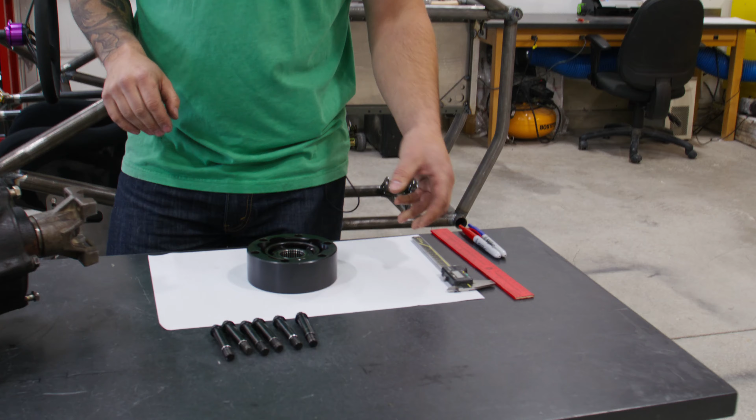So a quick and easy way to do this is to put our parts right onto the piece of paper. We're going to be looking at doing something like this. We don't necessarily need to worry about our pattern yet, but I think we're going to end up doing a pattern that looks like this. We're going to do all of our CV measurements in red. Let me go ahead and trace this out. I like to just use the parts to give me the layout so we don't have to worry about it.

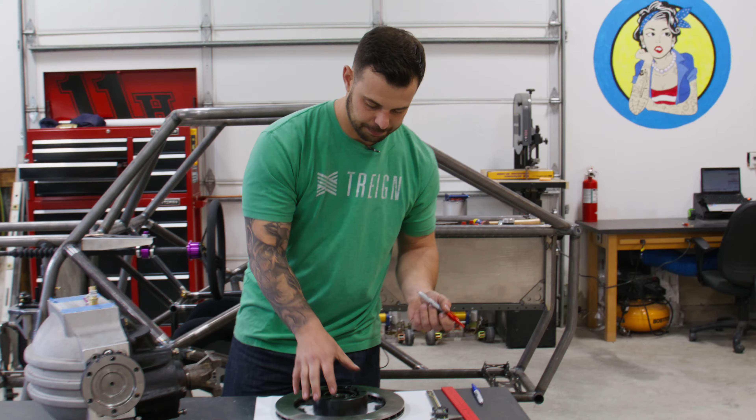As we do that, we can also come back in here and trace out our brake rotor on this. We're just gonna roughly trace out our brake rotor. What this is doing is telling me how many holes I need to put in this template. And then we're gonna take our calipers and create some measurements as we do this.

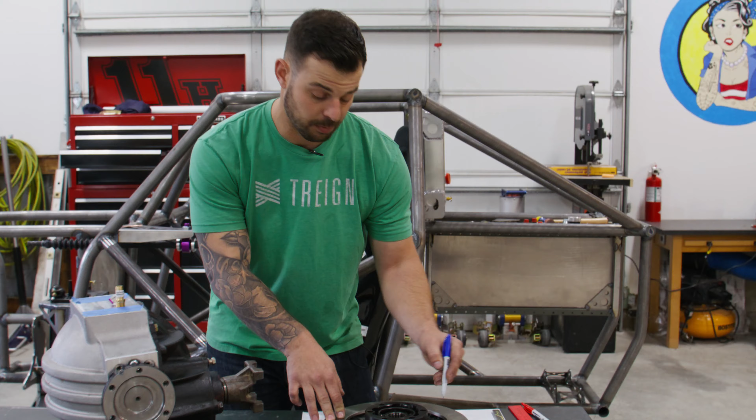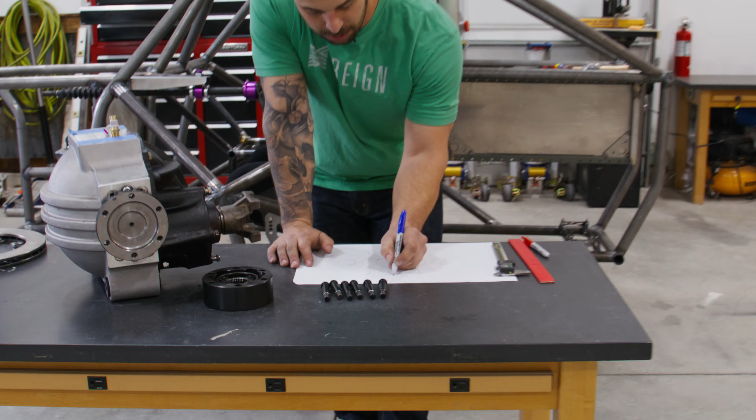Okay, so now we can go ahead and pull this off. We can also pull our CV out of the way. We gotta be careful because this can all fall apart, so we wanna kind of pinch that. Now that we have a general layout here, we're gonna draw in our circles. So this would be one bolt hole, second bolt hole on our rotor, and then we can do the same thing, hole and hole on our CV.

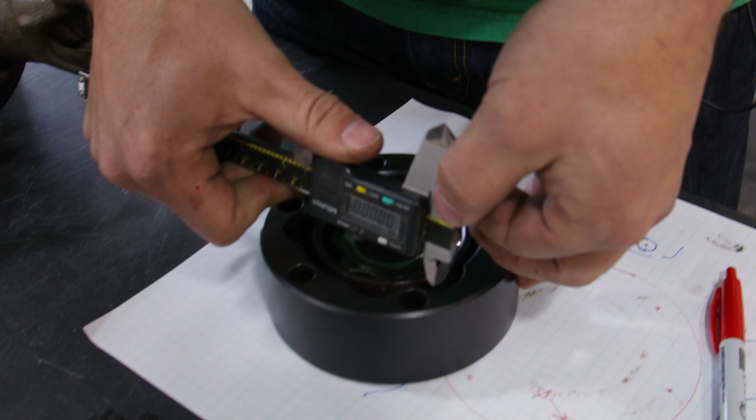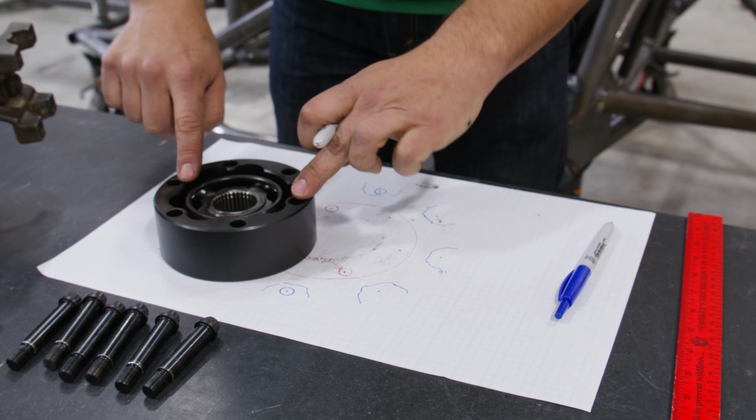The first measurement we want to take is the actual hole diameter. So let's take our calipers. These are cleanly a 1/2-inch hole. That looks great, that's easy math for us. The next measurement we want is the actual hole spacing. We're going to have 1, 2, 3, 4, 5, 6 holes, and we're going to measure center to center on that cross right here.

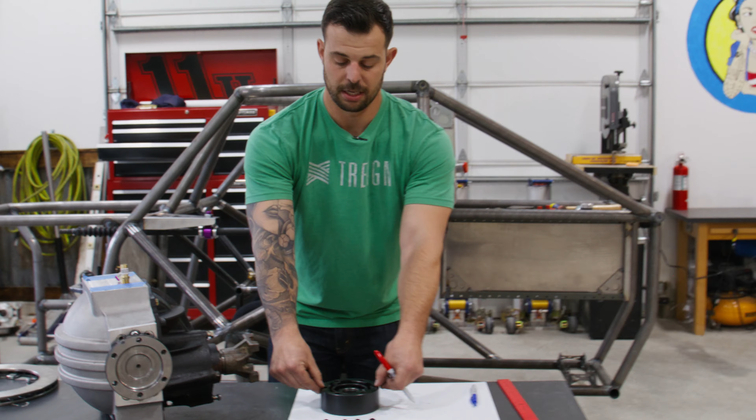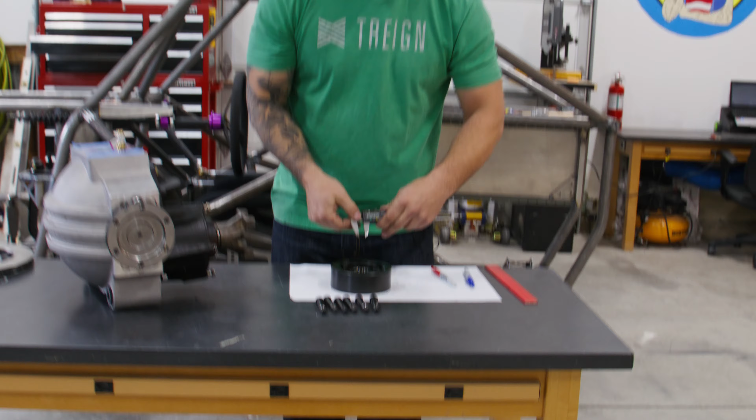A quick way to do this is you can measure the ID to ID on the 2 holes. We can measure from here to here, or from here to here. It doesn't really matter which way you do it. If you measure on the inside of the 2, you're going to end up adding the diameter, right? That gets us back to the center of those holes. So let's do it as an example here.

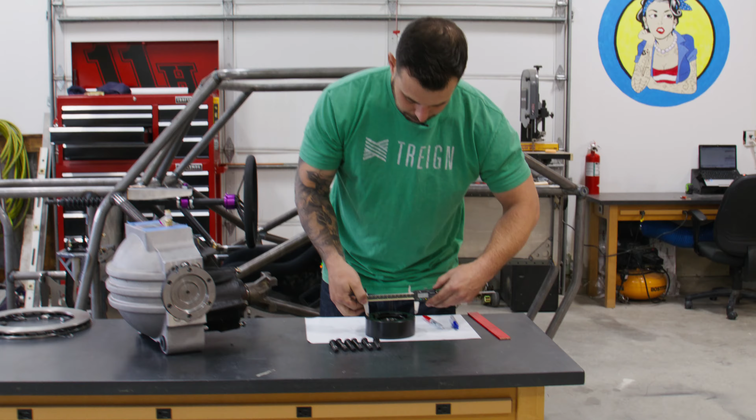So if we get this measurement of 3.7, we're going to call it, probably 3.745. That's it. Reading them upside down. Yeah, we're gonna say 3.745. We can draw a line in here. So we're measuring from inside to inside right here.

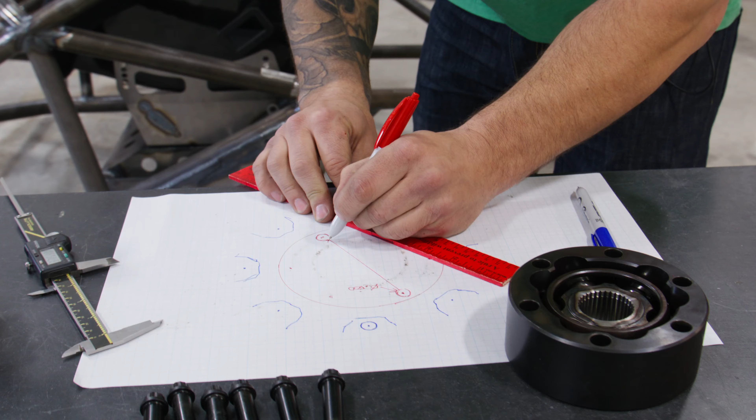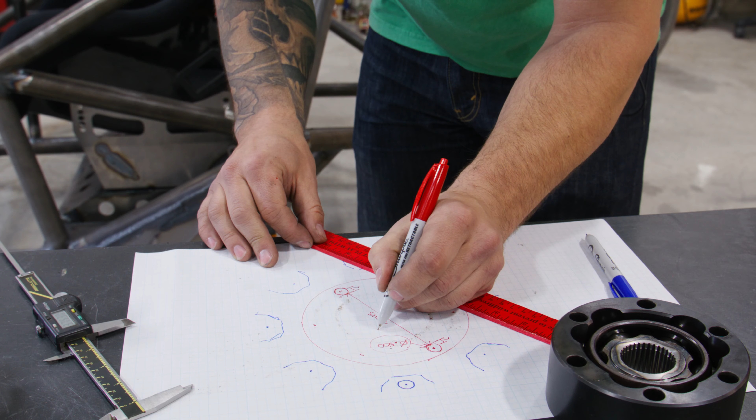This is 3.745. So we need to add the radius here and the radius here, which happens to be this diameter. If we add that diameter, we get 4.245. So this is most likely a 4 and a quarter split. That's probably what we're gonna design it for.

The next thing we're gonna do is rinse and repeat on the rotor, the same exact process, creating that hole pattern here. We also gotta remember that we want it to locate onto this stub axle. I want it to sit onto this shelf right here and locate so we're not wishy-washy out on the outside. And we also need this small bore put into the center of this part, so that the center of our CV and the axle can twist and locate into those.

Since we have a little bit of movement here, we have to have some clearance built into that. So I'm gonna arbitrarily draw a little half circle in here, and then I'm gonna call out the diameter. We're gonna take a quick measurement over here.

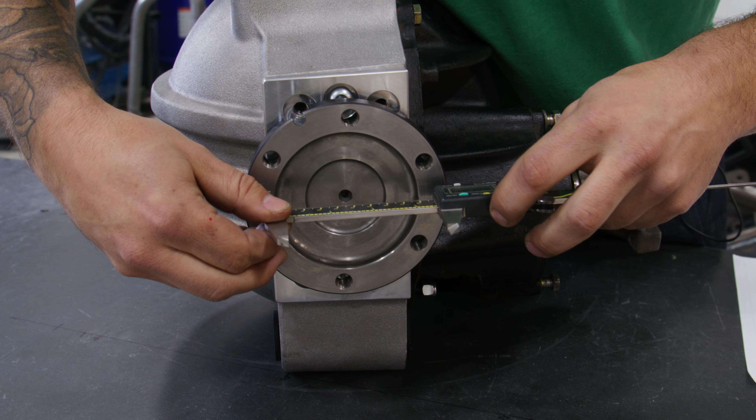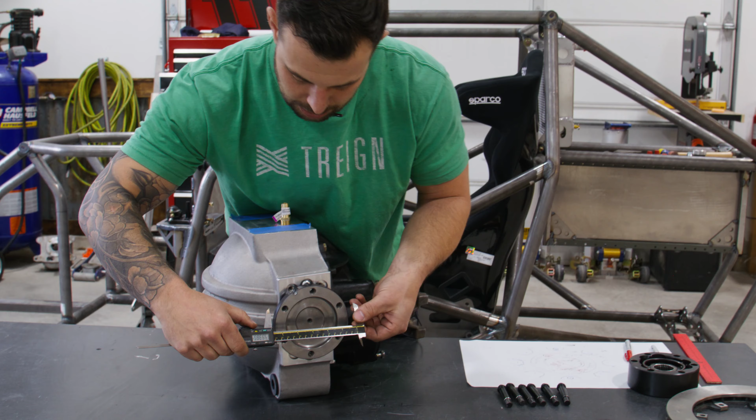So this is looking like 3.5. So we're gonna take that 3.5 in. And yeah, okay. And then one last measurement, we're gonna go ahead and measure this nice and accurately. If we wanted to get a press fit or something, we'd be using micrometers, but we're gonna end up oversizing this just slightly enough to have a nice slip fit.

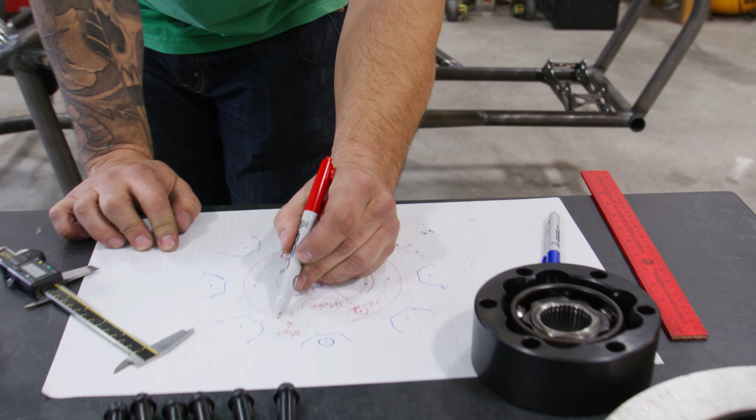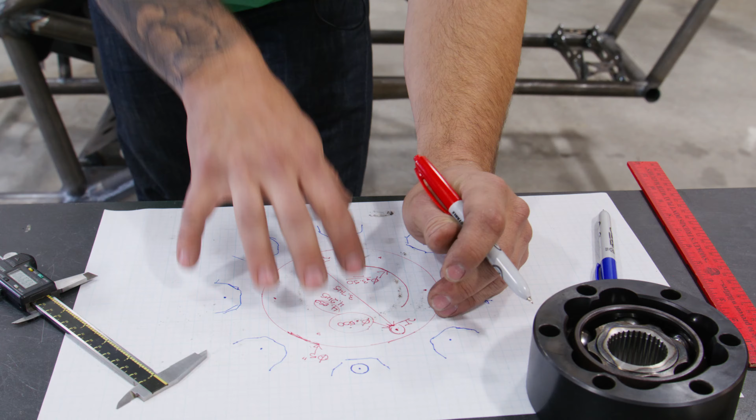So we're gonna go ahead and just make this diameter 5 inches. So that's the outside diameter of our CV. So we have all the dimensions we have of the CV now. So we have a 5-inch outside diameter. We have a hole center to center. So our center to center is gonna be 4.25. We have that inside little pocket that we're gonna end up making go all the way through. That's gonna be 3.5 inches. We're gonna go ahead and do the same thing, and then we're gonna head over to the office, draw this up in CAD next, and start making our templates.

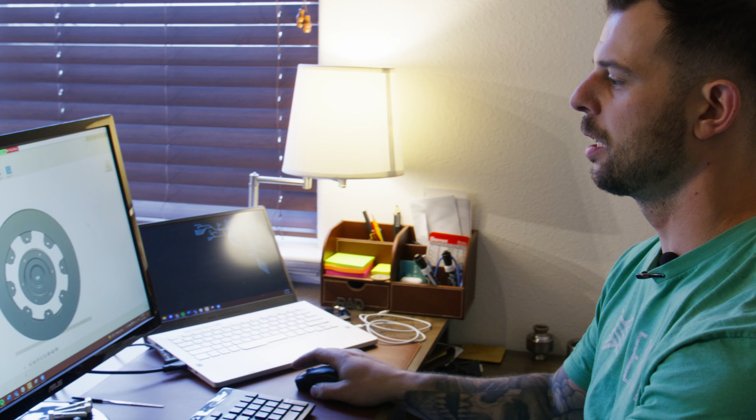All right, so I went ahead and took those measurements and we put them into CAD here. I actually ended up reversing the entire rotor and CV. This is gonna give me a little bit better of a depth perspective when I'm actually gonna be making these parts. The big thing that I wanna kind of show is that we can take and use SendCutSend to create a blank for us to CNC machine. So instead of starting off with a big flat piece of material in which we have to do all the features and cut the part out, they can actually cut the part out for us, have most of the features put into it, and then we just do a little bit of finishing work.

One, it simplifies all of the efforts that you have to put into it, like holding it down or tabbing it and having to cut the tabs off later. But it also allows us to not have all these random scrap pieces of material and oversized pieces of material that we have to find and source. We just kind of get the part that we need.

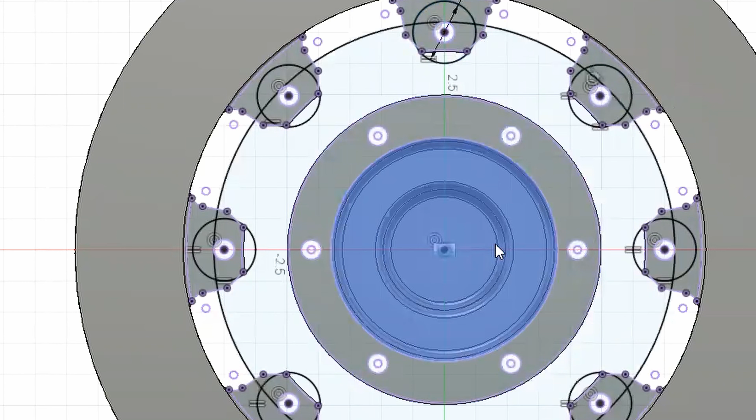So let's go ahead and look at this. I ended up creating a little pattern here, similar to what we did just in the shop a second ago. And we created a sketch. Using the holes, I ended up just projecting all of those features onto a nice flat surface. And then we can go ahead and extrude those, and we end up getting that mounting bracket that we're looking for. Now this current mounting bracket, we're gonna take this DXF to the shop. I'm gonna cut that out in that CO2 laser, just to double check hole placement, double check the orientations, that we don't have any weird things that are outside of our current views.

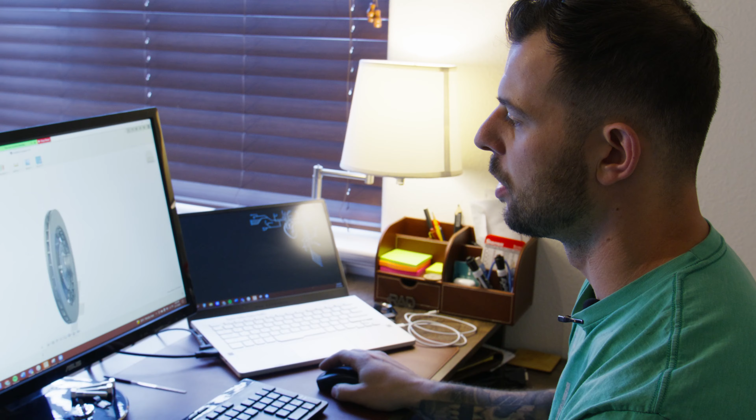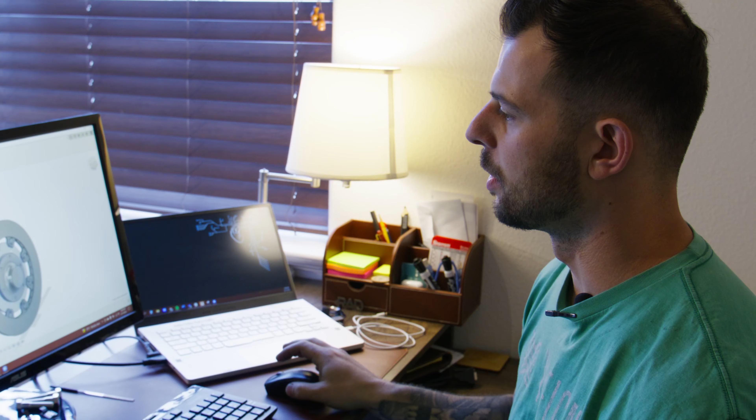I wanna check that that internal diameter here allows that CV to articulate the way it is intended to in the end. And then once we double check that, we're gonna go ahead and extrude that and create these little shelves for it to sit on and auto-locate onto the CV and the rotor, so that we're not having to line the holes up on a flat surface. It locates onto a little shoulder, and then we can put the bolts in. So let's go ahead, save that DXF now. I'll go double check it, and we'll move forward from there.

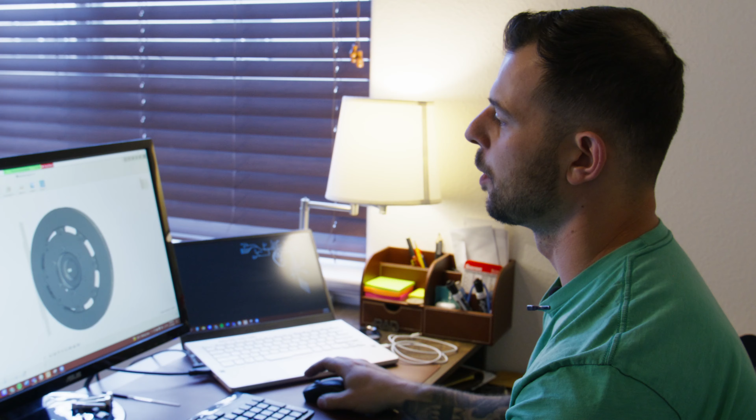So off camera really quick, I went out there and double checked it. There were a couple things that I had to fix. First thing is that the holes on the CV were too small. We have the shoulder bolts that are gonna end up going into those. I forgot to make them the same size as the shoulder. So we went ahead and fixed that, and I made them slightly larger to fit that shoulder. The inside diameter was great for the CV axle. It allowed it to articulate like we wanted it to, as well as the patterns all matched up. So I went ahead and did that.

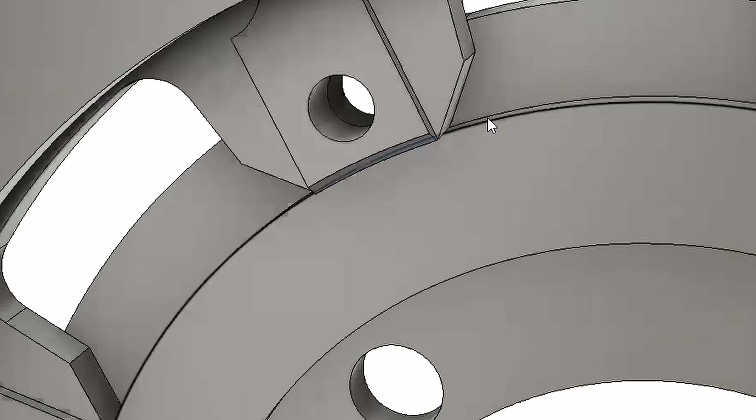The next thing I did is I created that little shelf for our CV and our rotor to sit on. So if we bring in our rotor here, we can see that our rotor will end up locating onto this little shoulder right here. And our CV will do the same. So we can kind of see in here in that little blue line where our CV is going to be located. One other way we can look at this is we can come in here and we can do a section analysis.

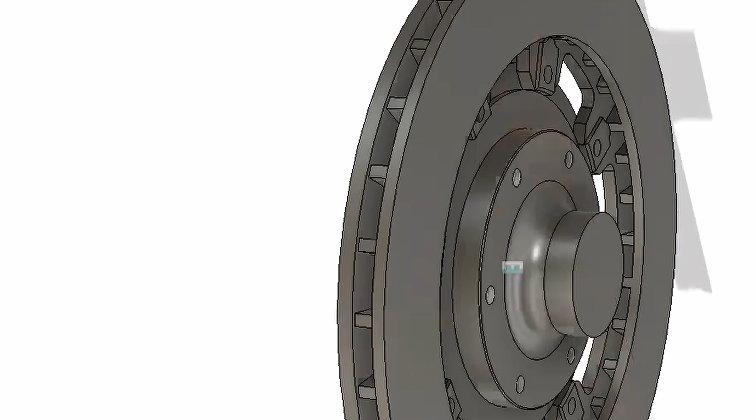And when we look at it from that side view, turn off analysis, we can see here that we're going to locate right here on that corner, and we're also locating in on this corner, as well as our holes are all nice and lined up.

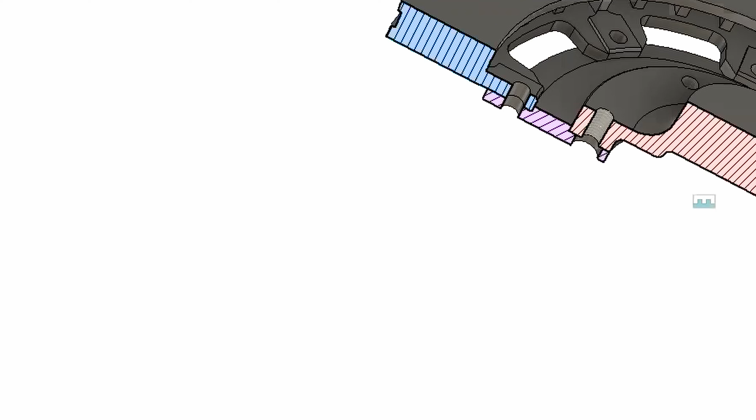So the next thing is now that we kind of have all the design done, we're going to go ahead and switch over to the CAM side of things. So in this one, I'm using Fusion 360 for my personal stuff. This one has a really cool built-in CAM feature, so I can go straight from that modeled part and go to the CAM. So let's go ahead and do that now. We're going to turn off analysis, turn off those other parts, and we're going to switch over to manufacturing.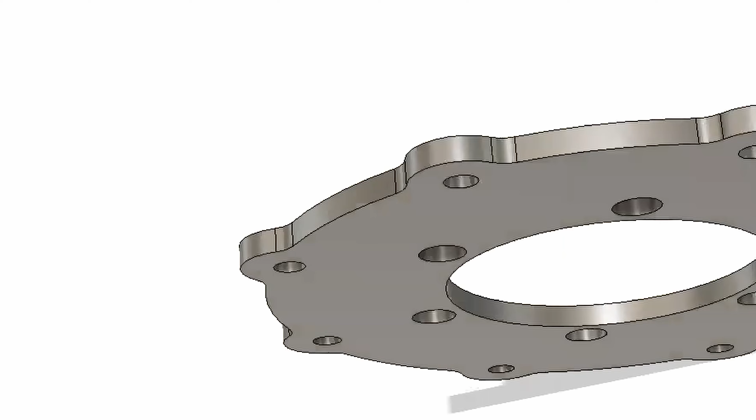So the big thing on this is that we can look at the thickness of our material. So on this one right here, I went to SendCutSend's website and I chose a 375 thousandths thick aluminum. That's the thickest aluminum that they have. It's in the 6061 series. We're gonna go ahead and use that. We're gonna maximize the thickness that I think I can get away with here.

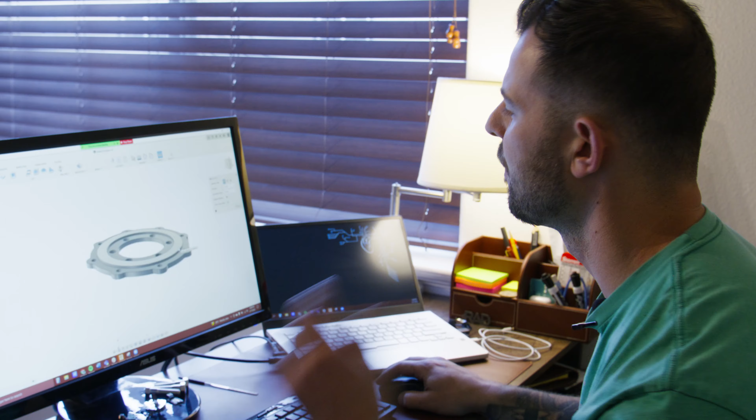So we have a 1/4 inch thick flange, and we're gonna end up having that 135 or 125 thousandths shelf there, right? To make up that 3/8 thick piece of material. So like I said earlier, the cool thing about SendCutSend is that we can essentially get this blank cut out that we don't have to cut out of a plate.

So another way that I would end up designing this would be having a plate, and then I'd have to contour my end mill all the way around this thing. That's a super great way to do it. There's nothing wrong with that. But if you say didn't have access to a CNC machine, you could just cut this out of 1/4 inch material and you'd be done, right? You'd have that mounting flange.

Or you can cut it out of this 3/8 material, and then we can groove in these little lips and stuff and make this part a little bit more versatile, a little bit easier to locate when we're putting it together. They aren't necessarily needed features, but maybe it makes it a little bit fancier. And we don't have to do as much machining on the back end.

So what I ended up doing is you can go ahead and undersize your holes. So I'm gonna go ahead and actually interpolate and re-pocket all of the holes that SendCutSend is gonna be doing. So all of my holes are gonna be 10 thousandths of an inch undersized. That's gonna be just enough that I can come in on a full depth and just do one single cleanup pass on every single hole, as well as use those holes as a locating fixture in the machine.

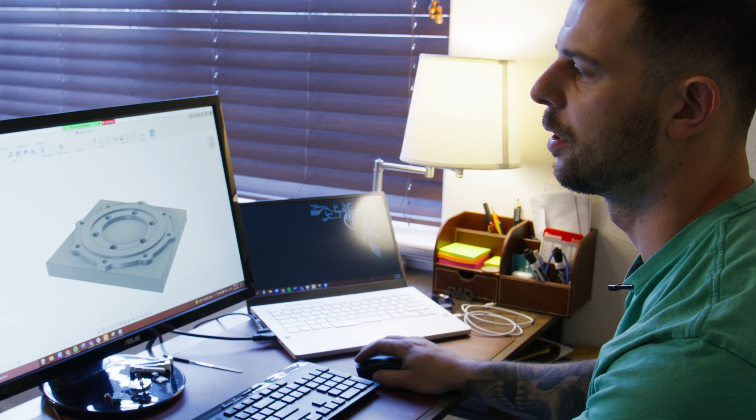So let me show you kind of how I did that. I went ahead and created a plate on the bottom. So we always have kind of random scrap pieces of material laying around, and in that material, I'm going to drill and tap these 1/4-20 holes in that plate. These are going to be used to mount the part down to it.

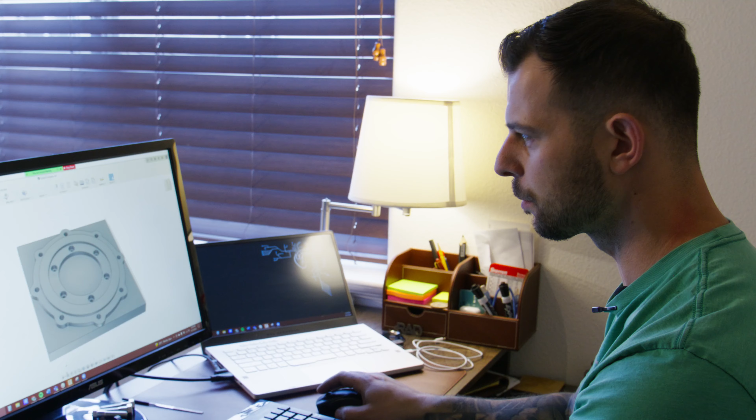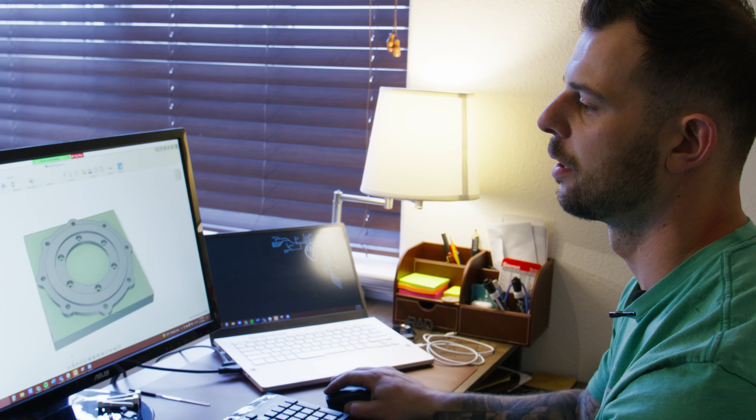I typically have a plate in the shop that I just do this kind of stuff to. I just turn it into Swiss cheese as I make different parts on it. So I'm gonna go ahead and use that plate. We're gonna mount this down, and then we can create all of our different fixturing on it. So we're gonna do this in 2 different operations. We're gonna first mount through our inner holes and then do all of our outside holes. And then we're gonna switch our bolts to our outside holes and do all of our internal holes.

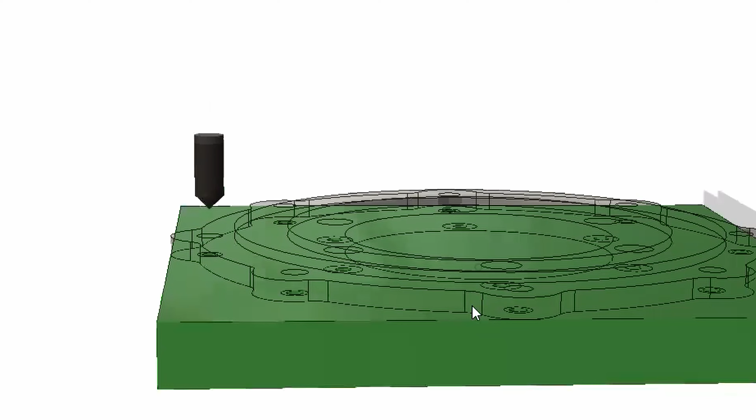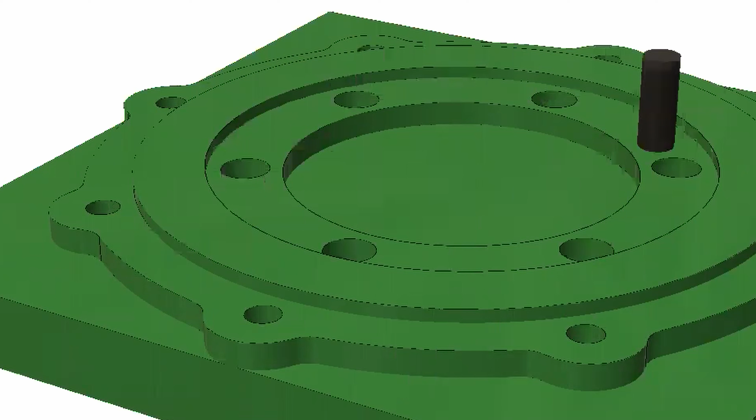And then we can go ahead and actually look at that final simulation and see that we have a plate in here. We can see how that's just gonna actually end up contouring and removing this material out of here and ending up with the final part that we actually want. So we're not gonna actually see any material being removed here necessarily because we don't have any material to be removed other than that little 5 thousandths variance here.

So now that we kind of have that settled out, we're gonna go ahead and take this to the CNC once we get these parts. So I'm gonna go ahead and order these parts from SendCutSend and get these parts back. We're gonna go straight to the CNC and machine these parts, and then we'll go to the shop, check it out. Like we talked about in the office, we got all the CAM stuff taken care of in the background while we got ready for this part to come back to us. We got the part to us now.

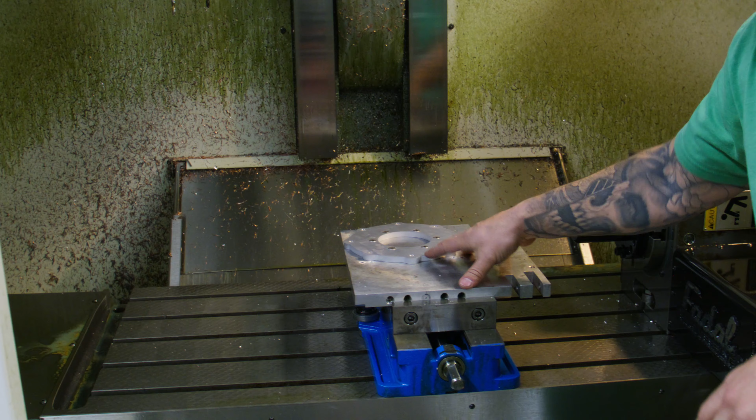I've gone ahead and made that fixture by putting all those tapped holes in that we talked about earlier. So let's go ahead and look at what I got here. We have tapped holes. I just have a random plate here that already had a bunch of holes in it that was scrapped in the shop. There's tapped holes, 1/4-20, in all of these holes also. So I went ahead and put all of the bolts in, tightened them all down so everything's all nice and centered.

We're gonna go ahead and run the first operation of this program, which is gonna thin out this outside, turn this contour on the outside, and then true up these holes to the actual size that we want. We'll go ahead and switch to the second operation by moving these screws out to the outside. We'll turn down this inside area and clean up those holes, as well as this inside contour here to match that CV. So let's get into it.

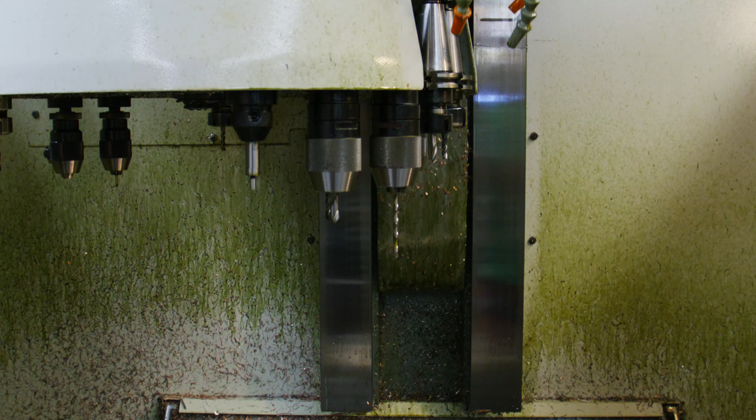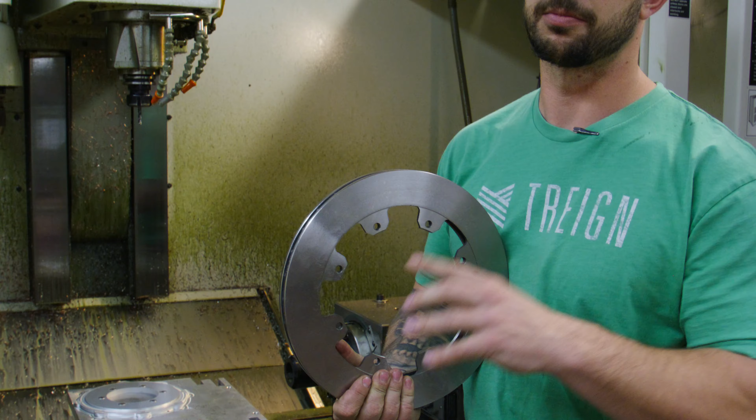All right, so the first operation's done. We turned down that outside. We have a little recess. What I want to do really quick before we switch over to the second operation is check the fit, that locating fit that's on the outside of this, on the rotor. So as we kind of come down, we have this beautiful fit. Look at that. And the holes all line up. So we're good to go.

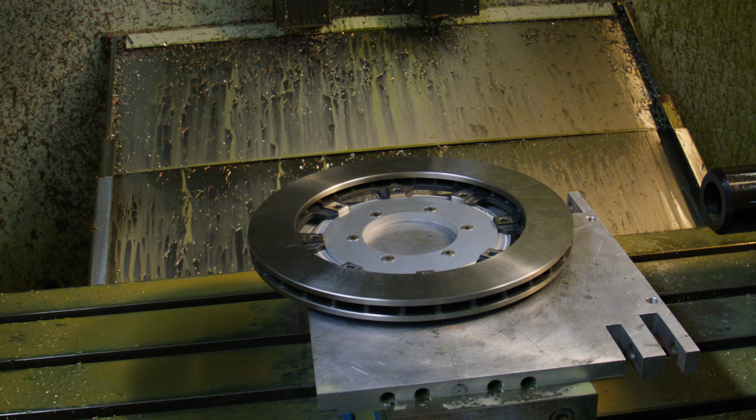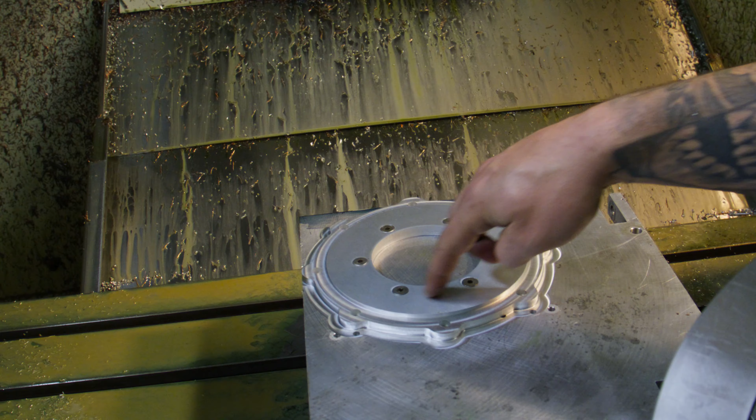This is actually gonna be flipped over this way, but since I can't check it, we're just gonna flip it this way. So when we actually mount it on the car, it's gonna be the other way. So we have a nice flat surface that these are now mounting to. We're gonna go ahead and swap out these screws. We're gonna move them to these outside locations here so that we can turn down this inside ring and true up those holes also. So let's get after that.

All right, second op is done. Everything looks really good. We're gonna go ahead and take this off, go over to the car, put it on there, get everything bolted up, and check the fitment. At this point, everything is done. If we take this thing out, putting it back in is gonna mess up all of our tolerances and stuff. We did all this in one setup so that we didn't mess up and move anything. So once I take this out, it's most likely not gonna come back in the machine.

But we did check already that rotor placement, and everything looked really good there. It was the same tool that did this inside groove, and we have a little bit more room on the inside one, so I'm not too worried about the fit there. So let's go back over to the car.

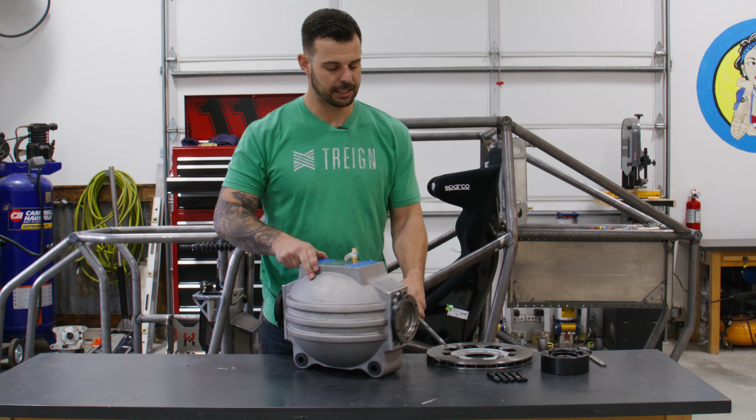Back in the shop after the CNC, I went ahead and cleaned these up a little bit and deburred them. Let's look at the location on the back here. So if we come in, it's a little bit of a loose fit, but we don't have really any wiggle. We can hear just a little bit of a knock. That's gonna help us hold this on. And all we have to do is get the orientation right to get those bolts in. I went ahead and mounted one of these rotors up already, so we're gonna do the same exact fit.

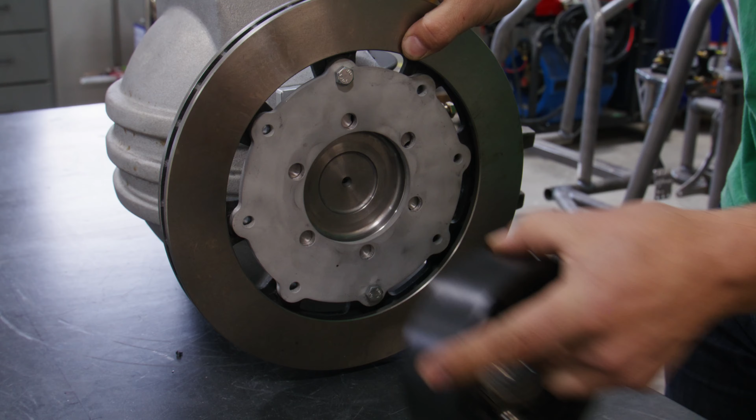Put this on. Hold this up. Once we find that bolt hole, there it is. Help it slide right in. We can start screwing that on. The same rinse and repeat with the rest of these bolts.

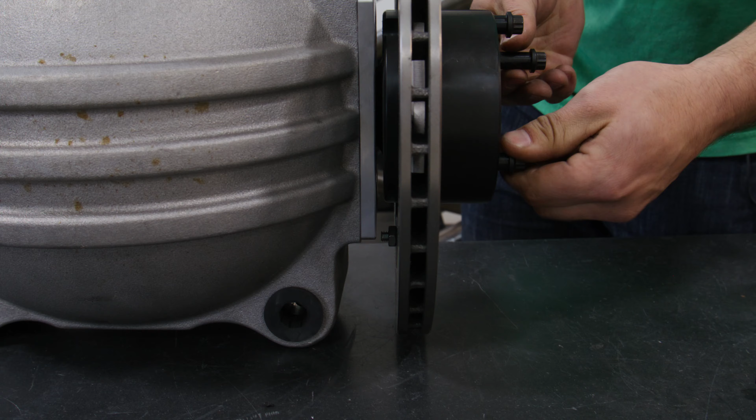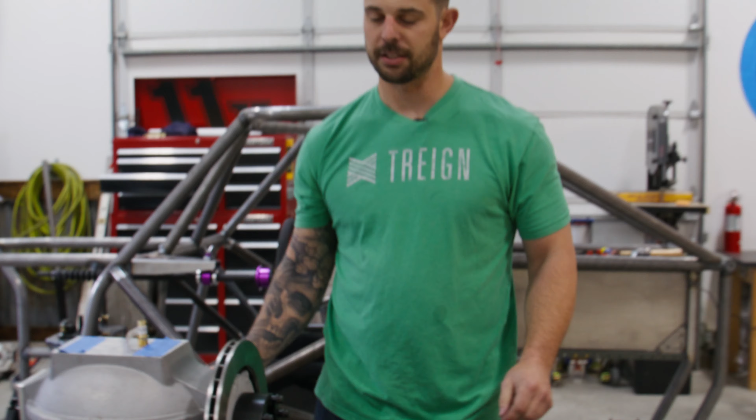Everything's sliding back in. Remember that the holes in this plate right here and the adapter plate are fitted to these shoulders on these bolts. So we have a nice tight fit here. We're not gonna be on those threads. It'll be a little bit stronger that way. The rest of these just started for you. Because now we have a nice mounted brake rotor to this housing.

The next thing I'm gonna be doing is there's some large holes up here. These are mounting holes from Dutchman axles. I'm gonna go ahead and actually use these to mount my calipers on. Since we're kind of in a tight space, I'm gonna have the calipers just slightly rock back for bleeding purposes, and then I'm gonna pinion mount the front along with the mounting on the bottom. So we're gonna have those inboard rotors.

A big thing on the inboard rotors, like we talked about, is that these end up saving us all that unsprung weight out there at the wheel. It helps us be a little bit more centered with the center of gravity in the car, and it helps us to control that tire movement. It's less work for the shock and the springs to do.